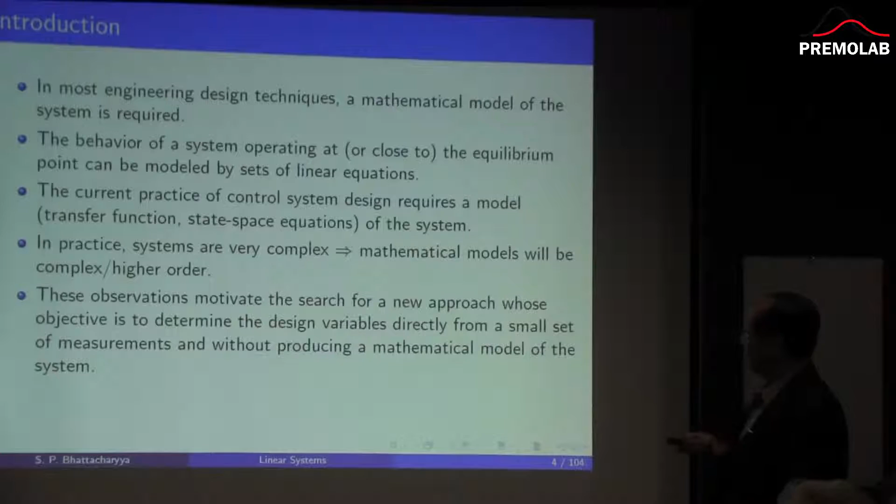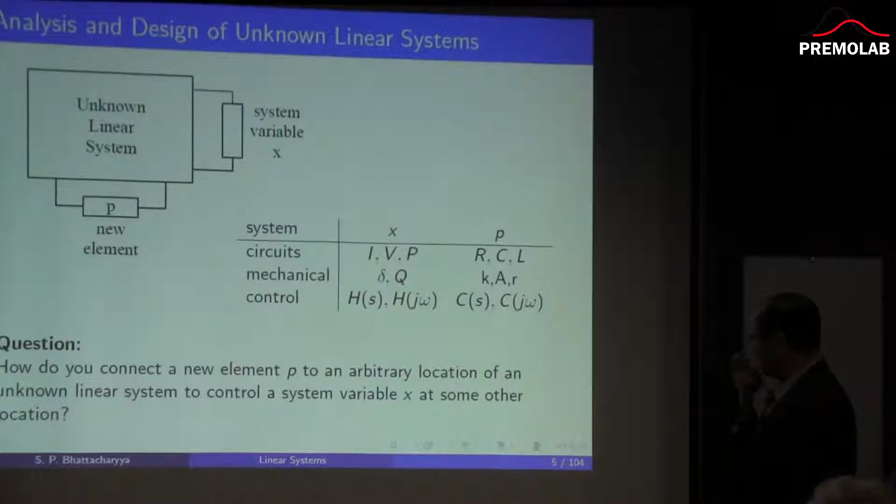So let's proceed: say you have an unknown linear system. You're going to add a new element. You're interested in controlling this variable. This variable could be currents, voltages, power, displacements, flow rates, transfer functions, and the design elements could be circuit elements, mechanical elements, transfer functions, dynamic systems. We want to connect a new element to achieve certain types of variables to be within some limits.

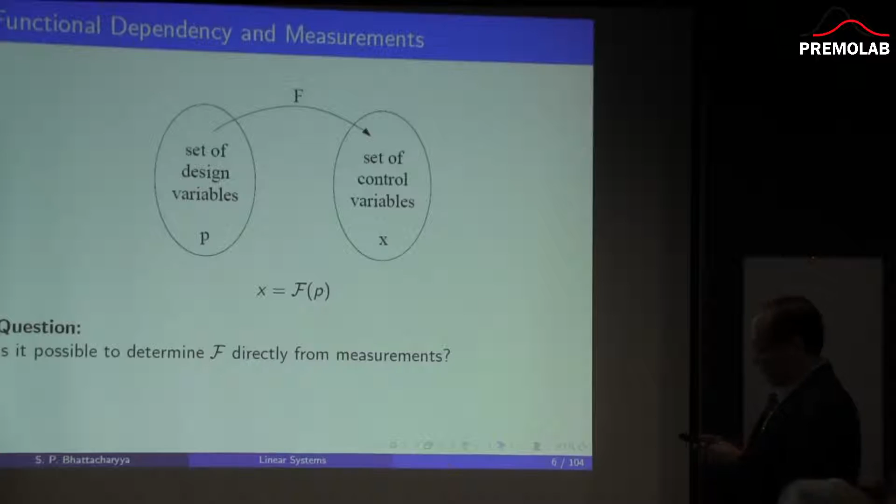So the whole thing is a question of finding out the functional dependence of these things without really identifying the system, because the system is fixed, and the effect of the fixed part of the system will manifest itself in this relationship. By a few measurements, you can extract the parameters of this relationship without explicitly knowing the system. So let's say you have a complex circuit. You are interested in the current in branch 9. Where is 9? Here. And your design variables are L1, C2. If you can find out these functional relationships, you can invert them, perhaps.

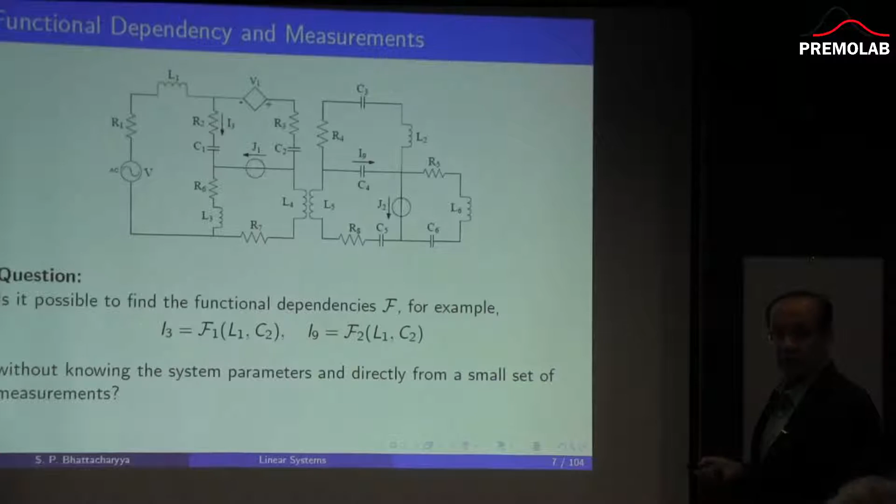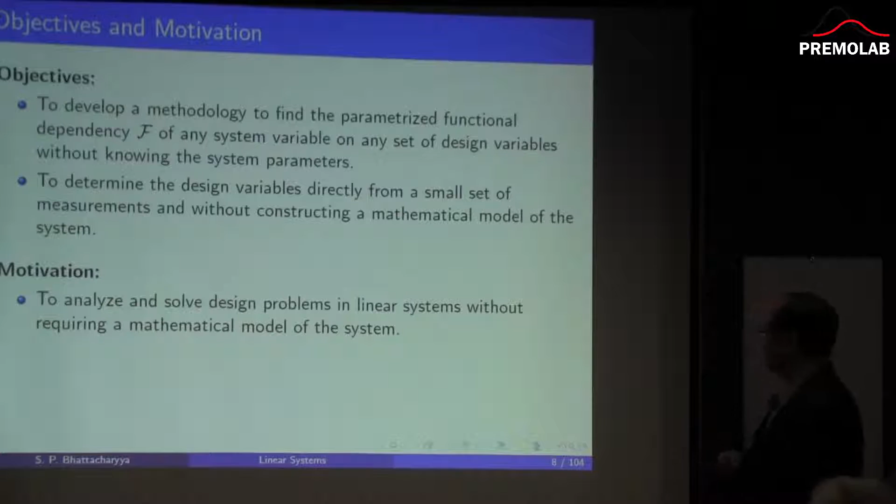So objectives are to analyze and design problems in linear systems without requiring a mathematical model. A few preliminaries. Let's say A is a matrix with a parameter P, scalar parameter, which enters the matrix A through this matrix A1. If you take the determinant of A, it's going to be a polynomial of degree at most r in P.

It's easy to show, and you can extend this to multiple parameters, and you get a multi-polynomial form like this, where the R1, R2, etc., which are the degrees of the parameters P1, P2, depend on the ranks of the matrices A1 through AL, the way it enters.

So let's say you have a linear equation like this, n equations in n variables. The Q's are sources, and typically they occur in this form in the right hand side, and the P's are as before, X's are the system variables, and we assume that A(P) is non-singular over the range of variations of P that are of interest. Otherwise, there is not a unique solution, and you are not talking of a physical system.

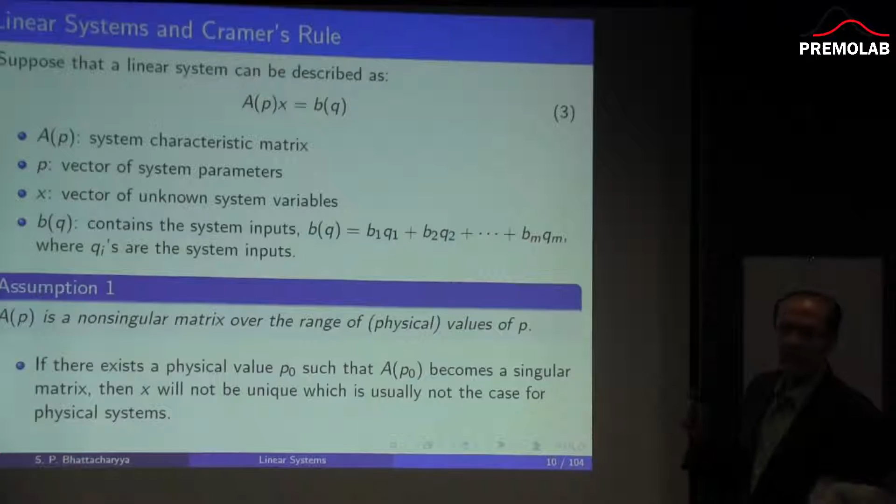So you solve for xi, and it's a ratio of determinants from Cramer's rule. And if you can evaluate these determinants, they are polynomials in P and Q. If you know the coefficients of the polynomials, you know this solution, and the coefficients can be determined by taking measurements. So basically that's what the talk is all about. So the solution for xi is the ratio of polynomials. It will be linear in Q, because when you take the determinant, the Qi's appear linearly, and it will be polynomial in P.

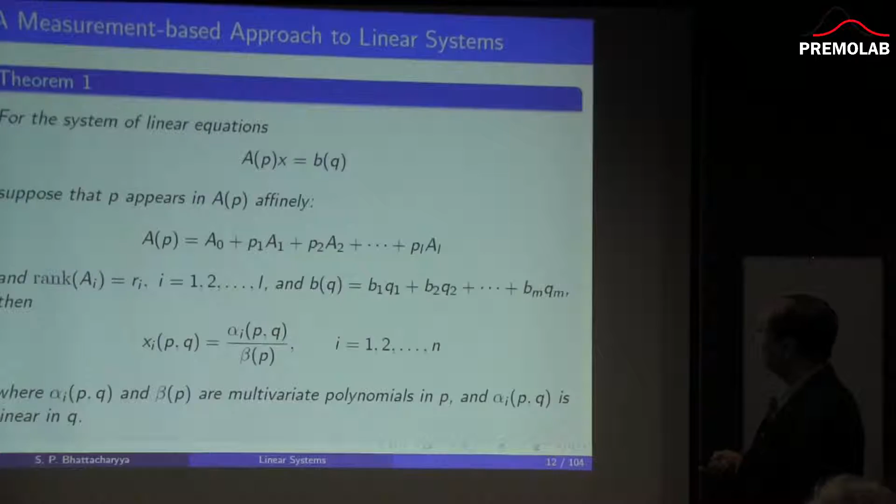So if you have mu unknown coefficients in those polynomials, you can attach elements to the system and take measurements, and then form an equation to extract the coefficients. Okay. So in that sense, it is a measurement based approach that directly designs the design elements. So we have a monograph that appeared last year, a Springer monograph describing this line of research. You can do this in what looks like a state space form, except this is static. So this is also described.

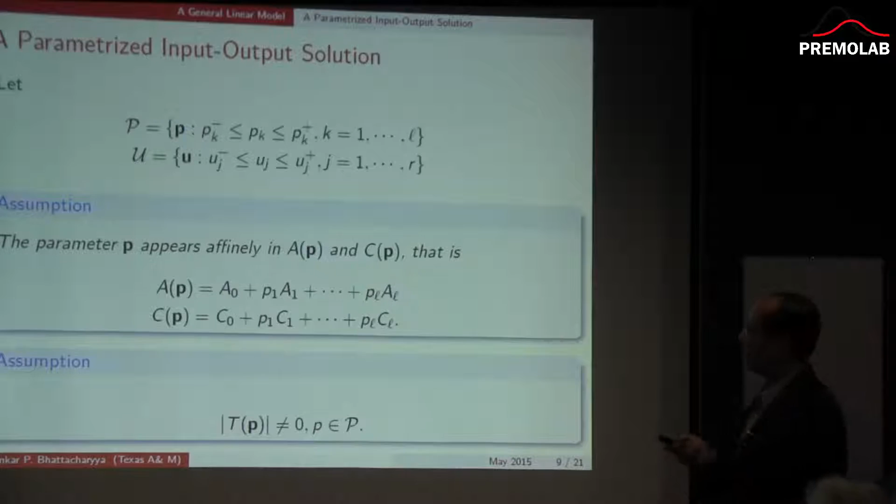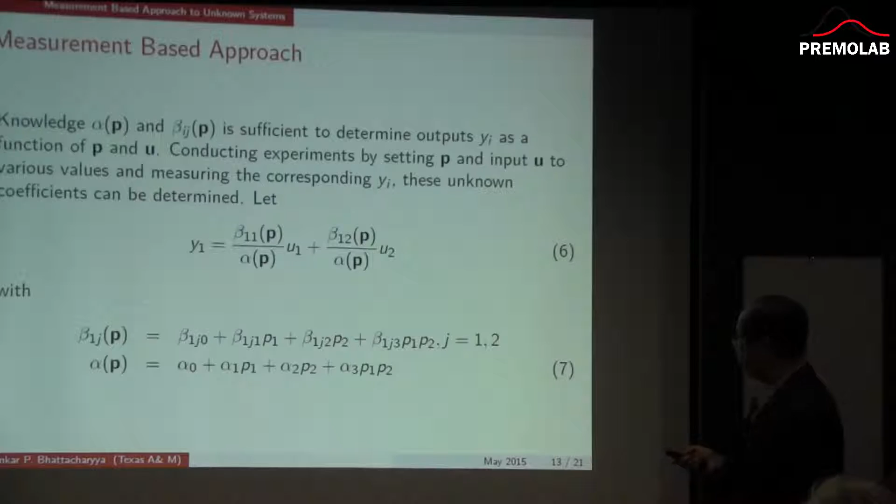You can consider interval parameters, design parameters, and interval inputs, and you get a functional dependency like this, which is relating the output vector to the input vector. So for example, focusing on y1, it's of this type. The coefficients betas and alphas are the ones to be determined, and they can be determined by setting, for example, the second input to 0, first input to be some particular input, and then set 7 different sets of parameters and measure the corresponding outputs. Then you can form a measurement equation, and solving that measurement equation, you can find the parameters alphas and betas. Okay.

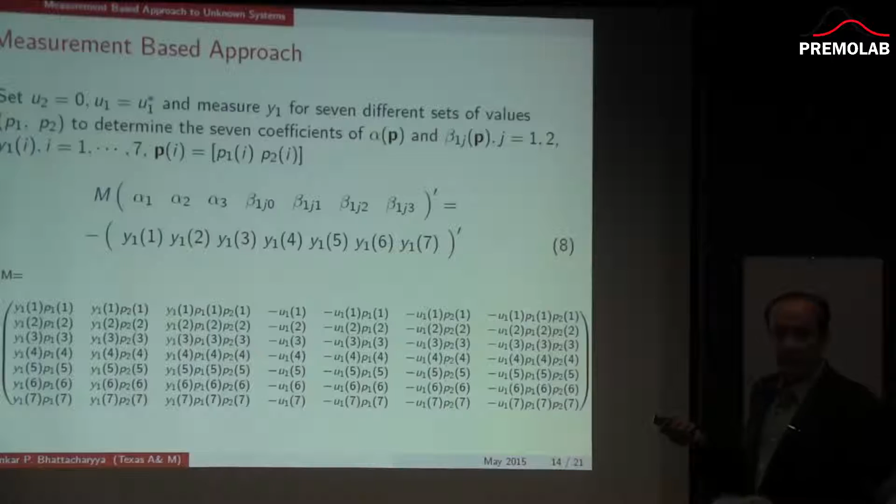So this measurement equation has to be well conditioned, it has to be invertible, of course, and so on. So there is some research to be done on what are the good measurements, because if this matrix is ill conditioned, you don't get reliable coefficients.

So here we are, DC circuit, unknown system. I want to control the current here by adjusting this resistor. It turns out that in these circuits, these branch resistors appear in the matrix A always with rank 1. Why? Because I can write down the branch currents, Ij, branch voltages, Vj, etc. The resistor Ri will appear only associated with current Ii, right? And so it will appear only in column i. It will always be rank 1. And regardless of the complexity of the circuit, you can have a million branches, but each Ri will appear with rank 1.

I'm saying this because we submitted this paper to a circuits journal, and the reviewer says, well, since you are considering only rank 1, you can only do simple circuits. That's not at all the point. It is generically rank 1. Only in very odd cases you might get rank 2 or 3, and it's not a problem to handle that. But you know, reviewers are nowadays so anxious to reject your paper that they immediately, but it's a foolish statement to make.

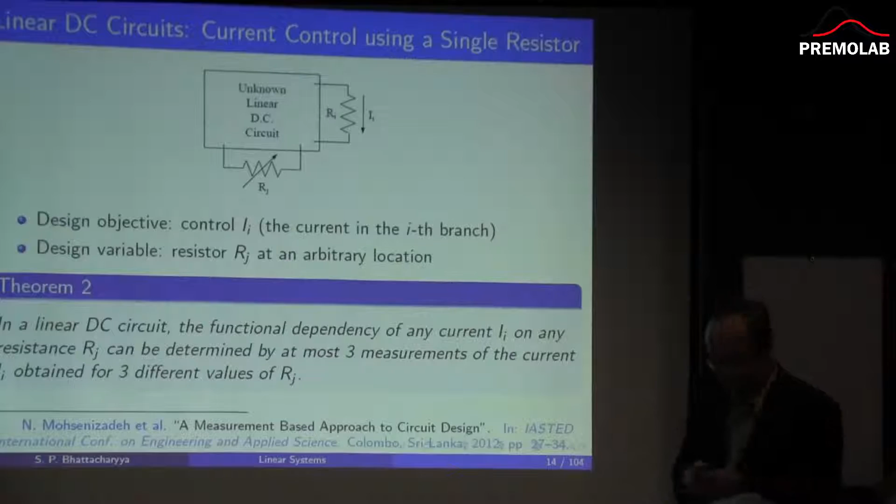So because of rank 1, this is going to be a ratio of polynomial of degree 1 over polynomial of degree 1. So 4 coefficients, normalized by dividing with 1. You have 3 coefficients. 3 measurements will extract those coefficients, right? So that's what we are saying here. So the form of the solution is like this because of the rank 1. Rank 1 is a generic property.

In fact, in almost any network, even a hydraulic network, this is true. The resistance Rj will occur with branch Ij. So by problem formulation, it is rank 1. Anyway, it doesn't make sense if both these betas are 0. So you can divide by 1 and reduce to 3 parameters. And then you take 3 measurements.

Set R to 3 different values, measure the currents, and form these equations to extract the alphas. And then you know the relationship. Okay? There are particular cases of this when the measurement matrix is singular, etc., etc. But generically, it is 3 measurements.

In Thevenin's problem, the resistor Rj occurs at the terminals. The control resistor occurs at the same place where you make the measurement. And in that case, one of the numerator coefficients is 0. And so it takes this form, normalized to 2 parameters. And that's why Thevenin's equivalents have 2 parameters, voltage and resistance.

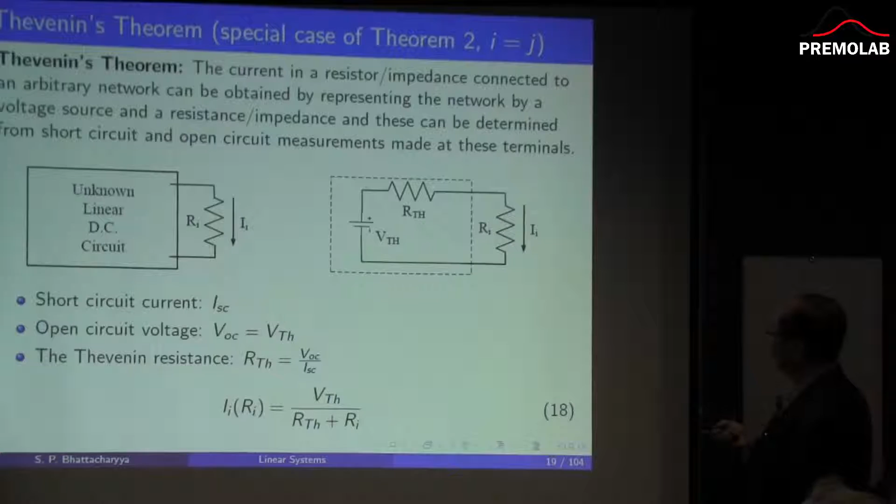Anyway, in Thevenin's problem, this is the situation. Rj and Ri are in correspondence, and so 2 arbitrary measurements suffice. Not necessary to do open circuit and short circuit tests, which are most often not feasible.

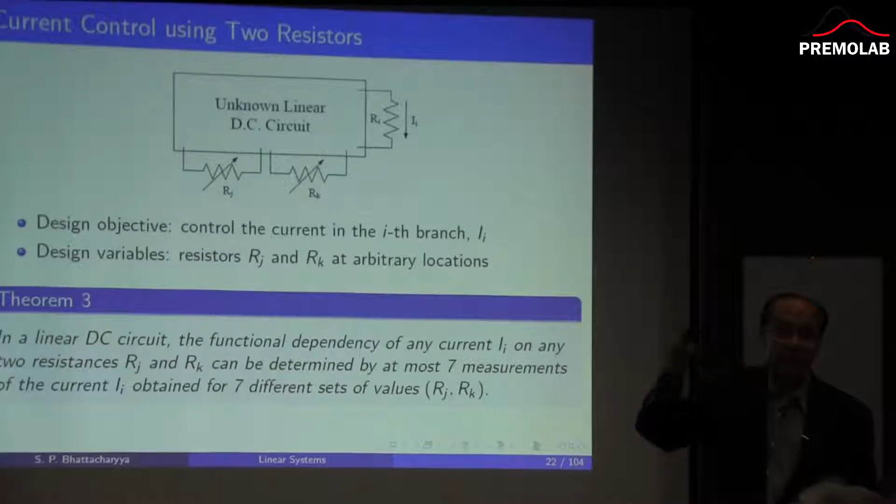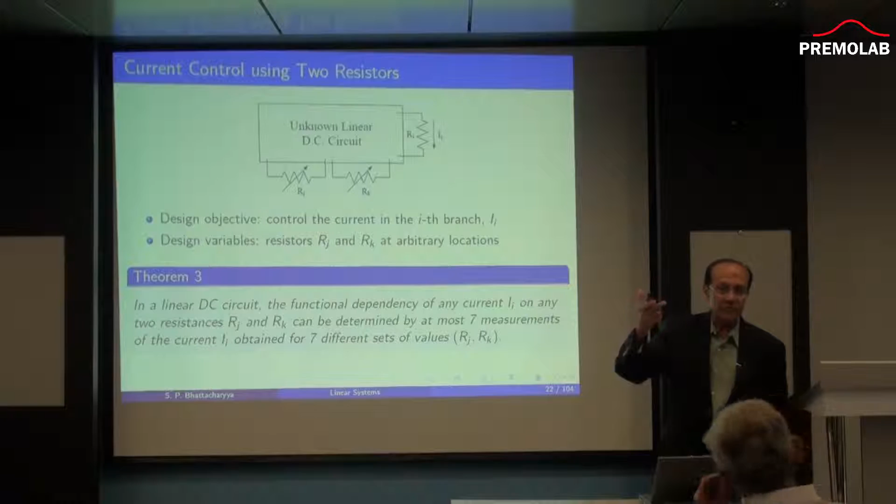What if you have 2 design resistors and you are trying to control current Ii? Well, you know that multilinear form, it's again rank 1 with respect to each resistor. So you're going to get multilinear in Rj Rk over multilinear in Rj Rk. You have 4 coefficients over 4 coefficients. Normalized with 1, you got 7. So 7 measurements of the 2 resistances and the current that you get will determine the system of equations, will determine the unknown coefficients.

So that's how you get the measurement equation. And then depending on the rank of the measurement equation, if you have over parameterized and there are some special cases, you can handle those. Some of those coefficients could be 0. You will detect that from the rank of the measurement equation, because that corresponding coefficient, when you take the determinant, it's going to be 0. So the measurements reveal a lot about the system without revealing everything about the system. It just gives you the information you need to design your parameters and not more.

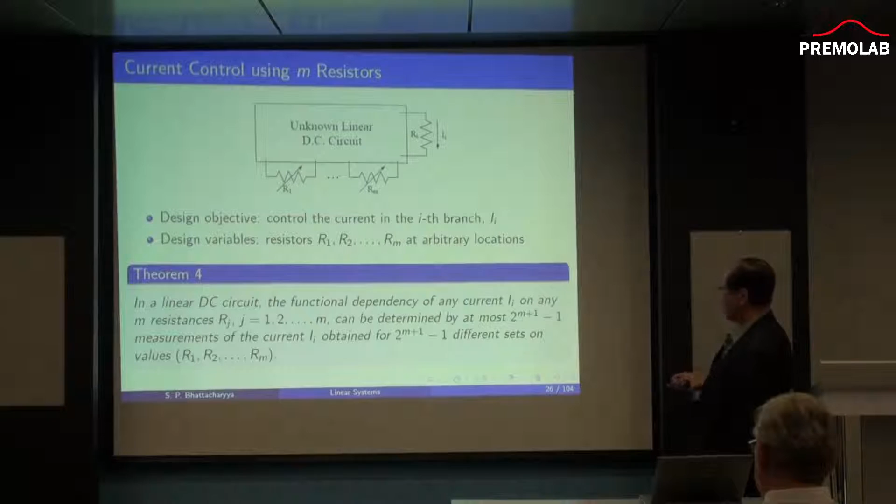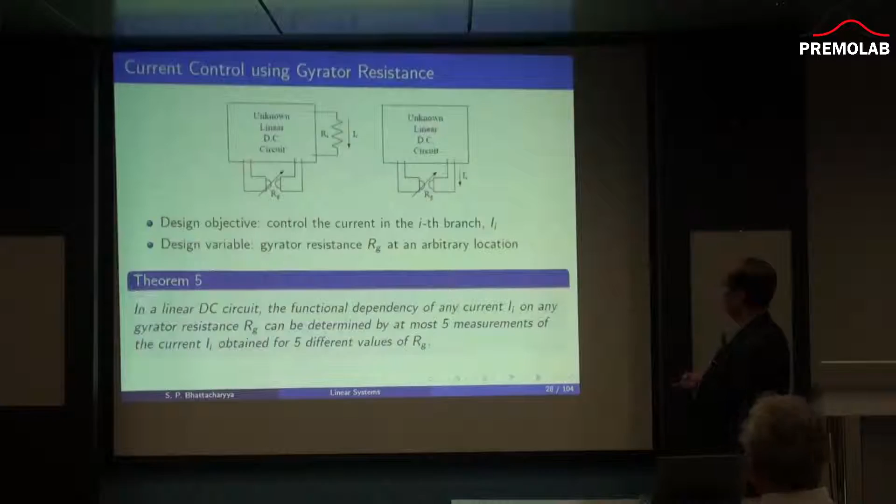So in general, for M design variables, you can take that many measurements, and you can extend these kind of results, because you have this, this looks worse than it actually is. It is actually multilinear in all those parameters. This example was included because

people said, well, there are situations where you have rank 2 dependence, for example, and there are circuit elements called gyrators. I was not aware of what a gyrator is, but the reviewer pointed out, why didn't you consider gyrators? So we looked up gyrators, and a gyrator is like a mutual inductance element. The voltage at terminal 2 depends on the current in terminal 1 and vice versa.

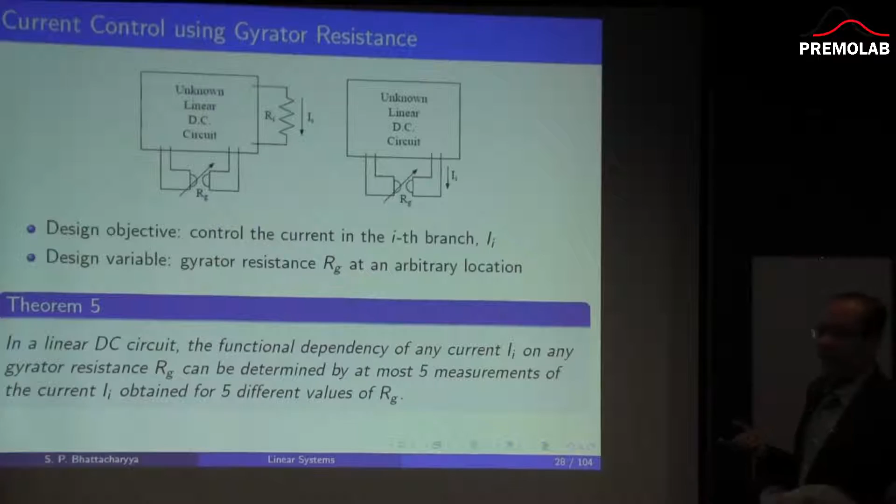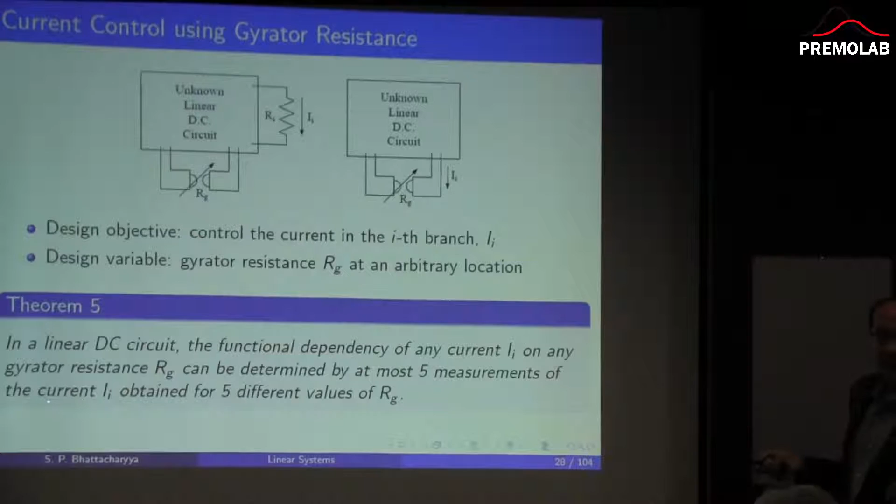So in that case, you get rank 2 dependency, and then in the simplest case, you're going to have 5 measurements rather than 3, because it's going to be a polynomial of degree 2 over a polynomial of degree 2. Okay.

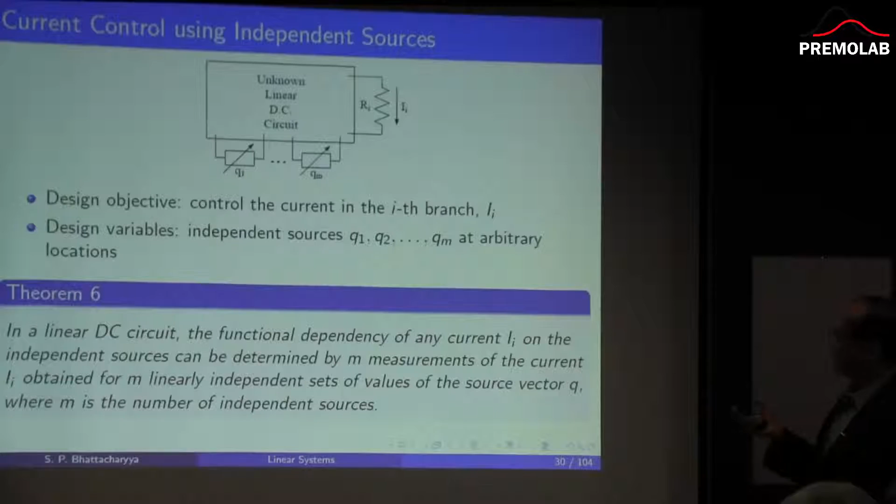What about if your control variables are sources? It's very simple in that case. This is where the superposition comes in. You just have a linear function of m parameters, and you can just set them to different values and, with m measurements, you can find the alphas, alpha 1 to alpha m.

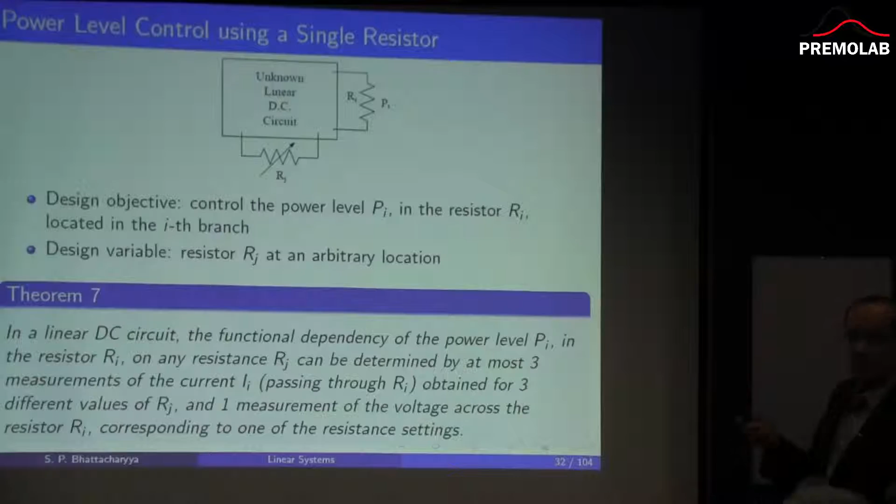If you want to control power, it is I squared Ri. So if you know the max and min of I, you know the max and min of I squared also. And so since it was monotonic, the power will also be monotonic. Now in Thevenin's case, there is a subtlety, because it's I squared, but then it's multiplied by Ri itself, and because of that, you don't have monotonicity, you have a maximum.

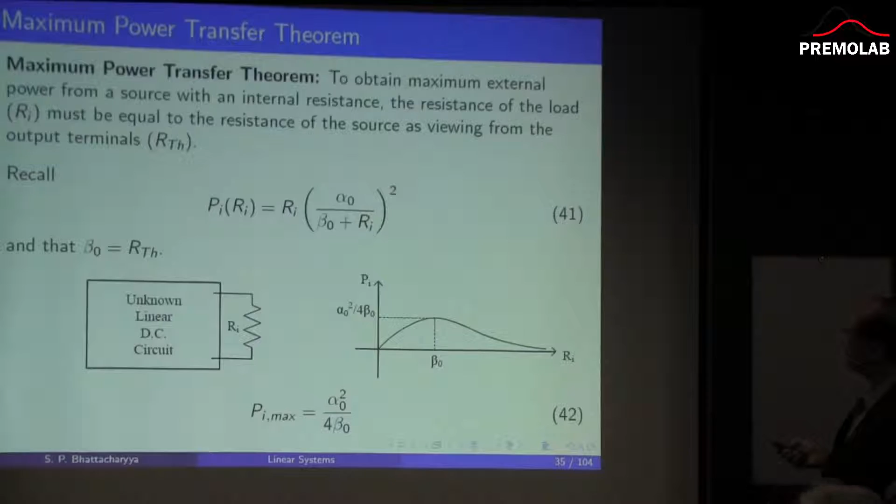Again, the maximum can be found from those 2 arbitrary measurements by finding alpha 0 and beta 0. So you can have a generalization of this maximum power theorem. You want to maximize the power in this resistor by adjusting Rj. You can get explicit expressions for what to set Rj in terms, and it's all in terms of the measured variables.

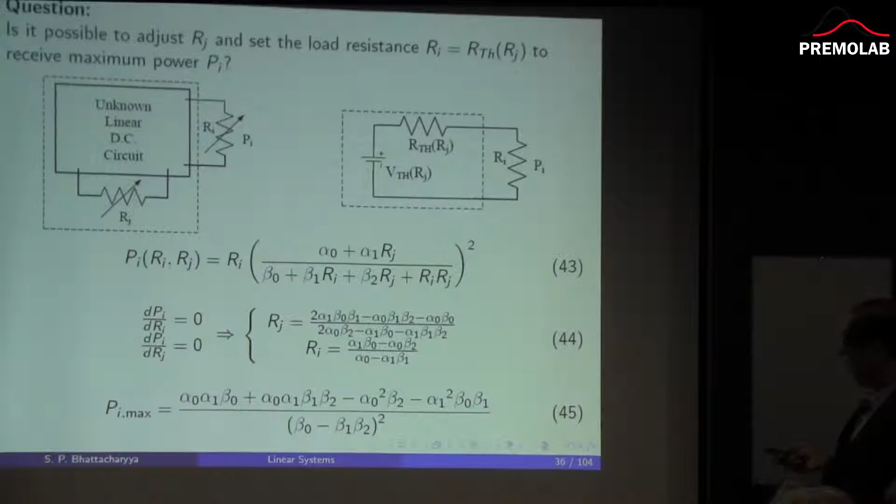So, are you going to tell me when the time is almost? About 2 minutes. About 2 minutes. No, actually 5 minutes. Wow. So I am at 36, I have 104 in 2 minutes.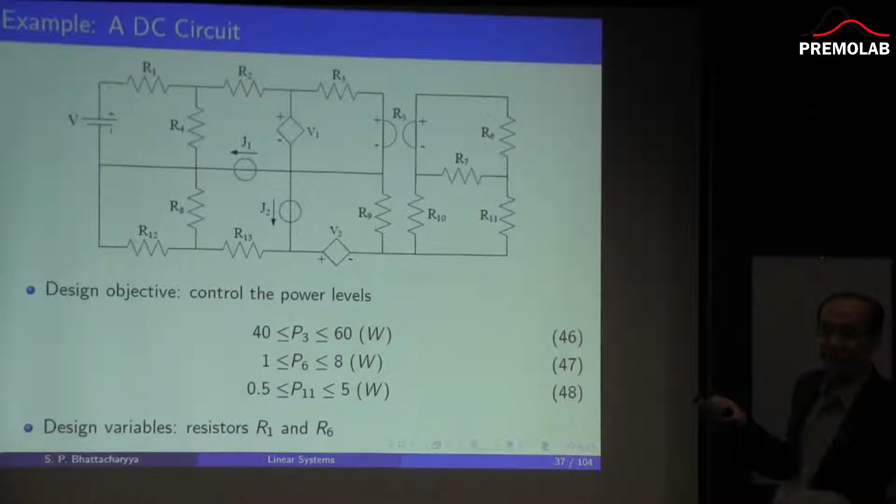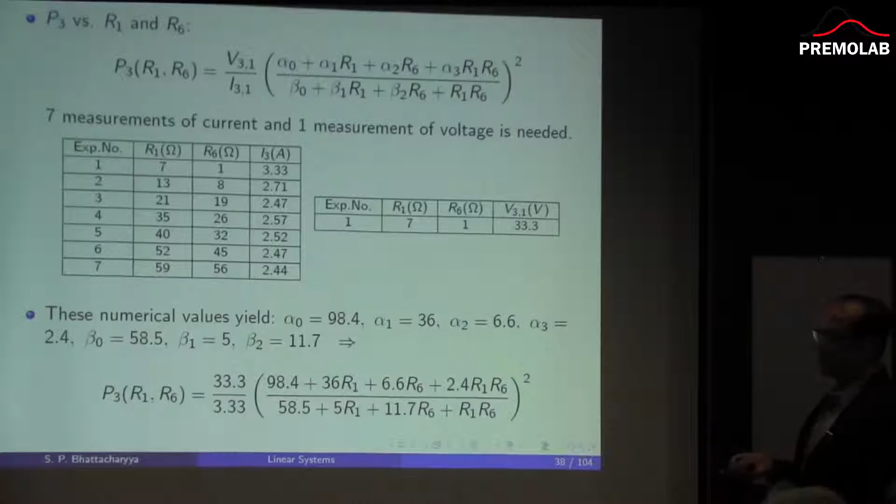Anyway, so let's run through these slides. Here I want to use R1 and R6 as design variables, and I want to control the power in these 3 branches, 3, 6, and 11. Okay, and I don't know this circuit, of course. Take some measurements and find those coefficients. Then you have the functional dependency, and you can plot each power in this plane as a function of R1, R6, P3, P6. It shows the monotonic behavior in each direction, right?

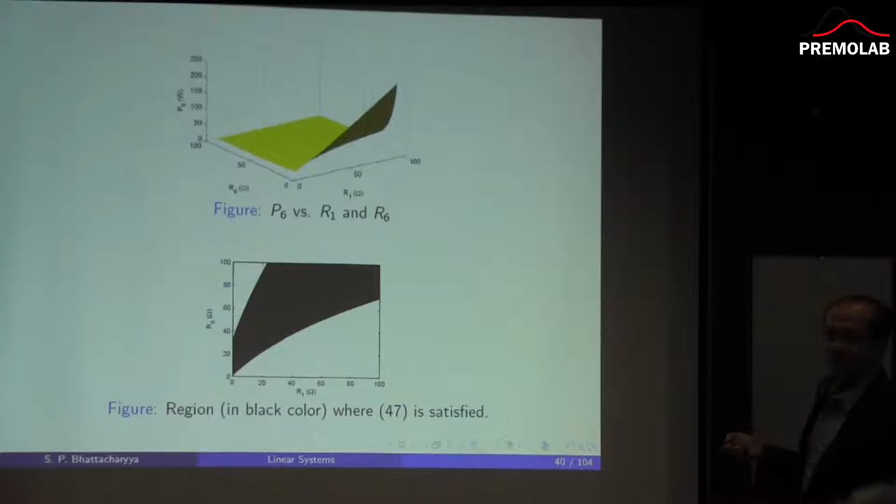And then you can impose the power level constraints 40 to 60 and extract the design variables. You can do the same for the next constraint and the third constraint, and then you can intersect those to find the feasible range of design parameters. So this is really neat because nowadays there is a lot of preoccupation with designing low power circuits, etc. You can do these for these large scale circuits without knowing the model, just measurement based.

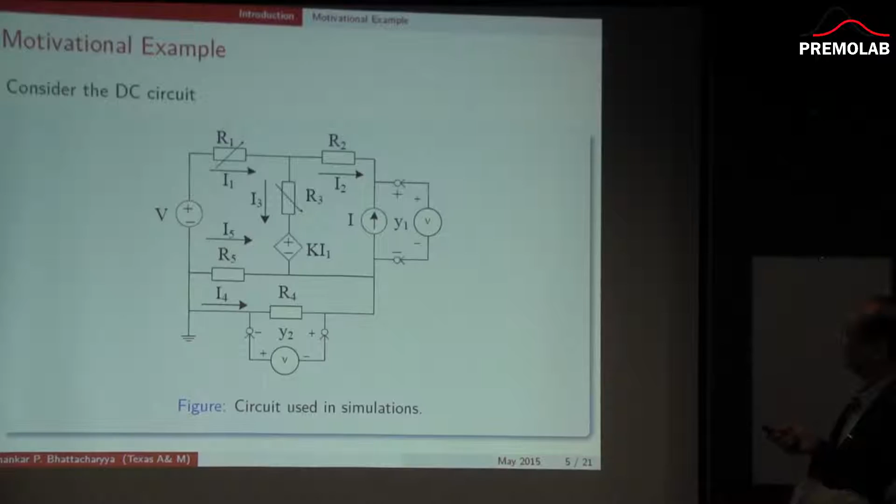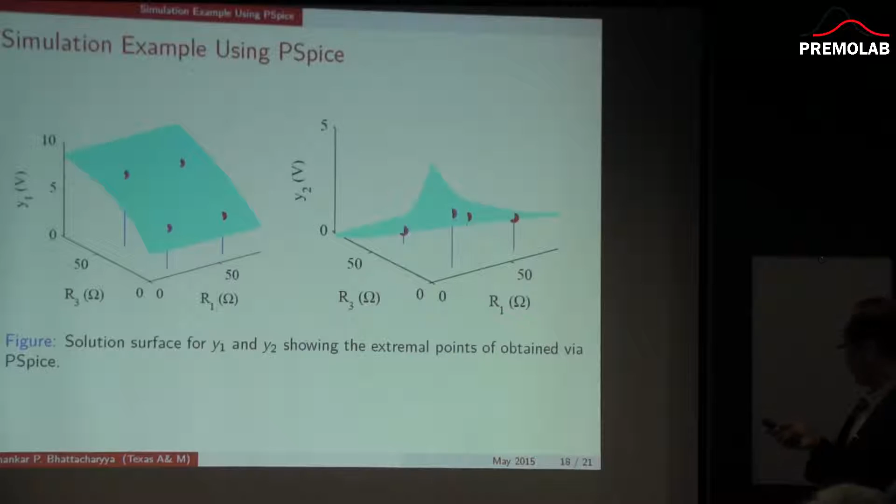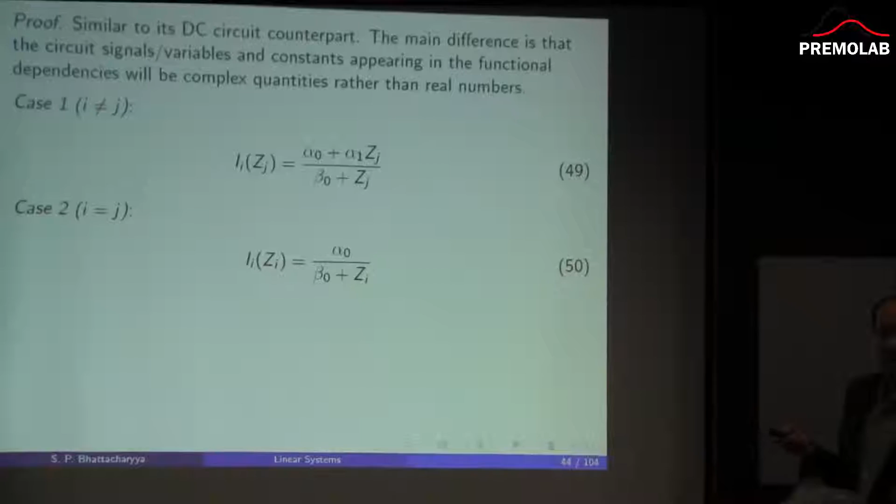Okay, so another DC circuit. Let me skip these DC circuits. There's too much DC circuits. So again, this monotonic behavior tells you that the extreme points are at the extreme values of the intervals. The same thing for AC circuits, except now Cramer's rule applies with complex numbers, and you have impedances and complex currents and voltages if it's a circuit operating at a fixed frequency. And so you can solve problems of this type.

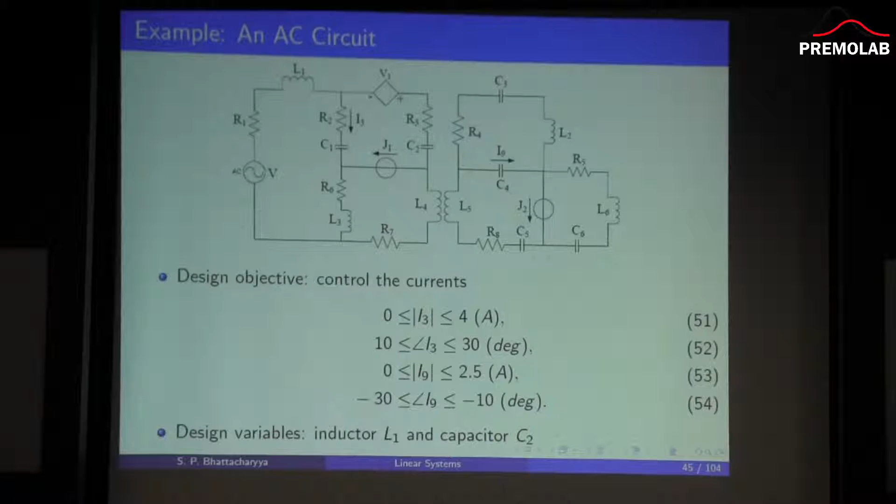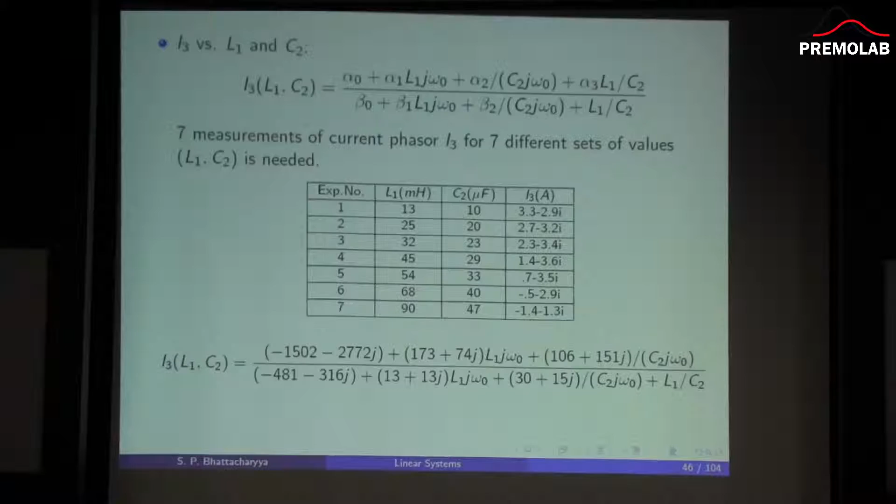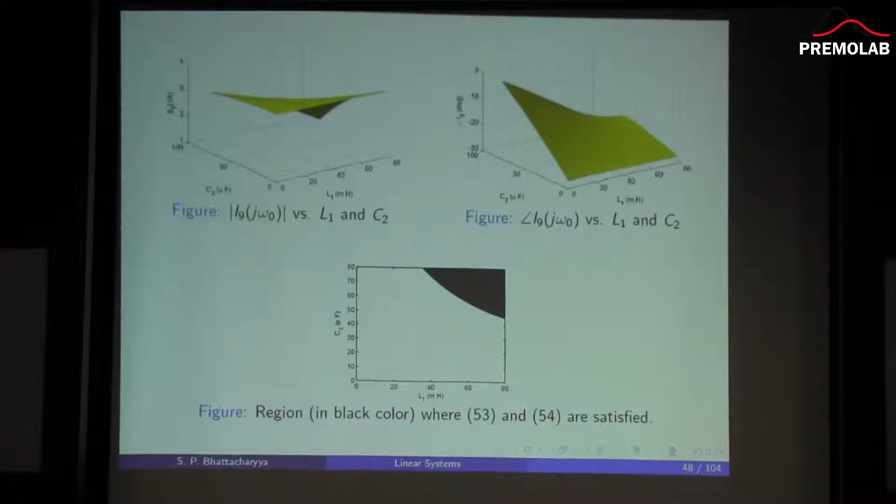You can constrain the magnitude and the phase, and find out the range of design parameters for an unknown circuit. This is the functional dependency after taking some measurements with L1 and C2. And then you can do the same. This is magnitude versus L1, C2, phase versus L1, C2. You can intersect them, and then you can find the range of design parameters.

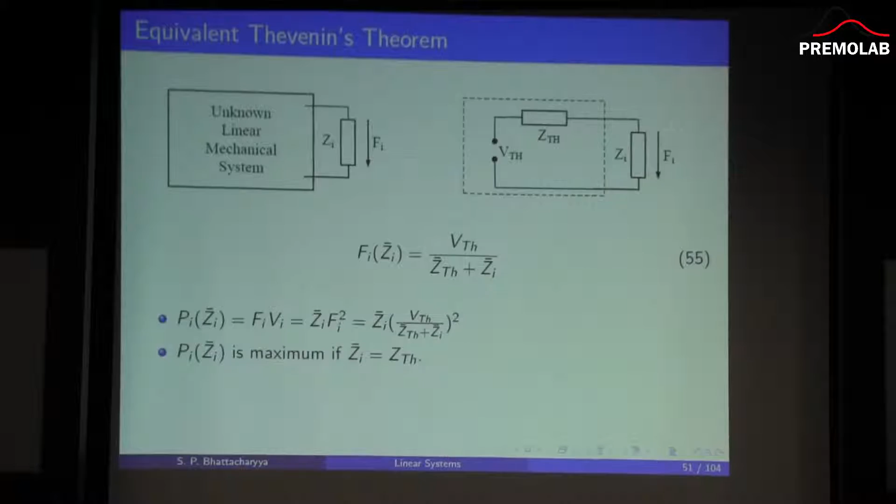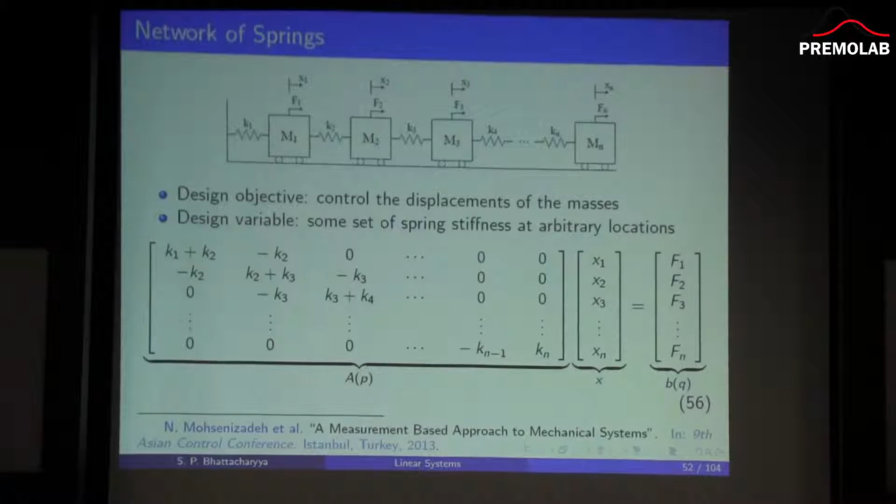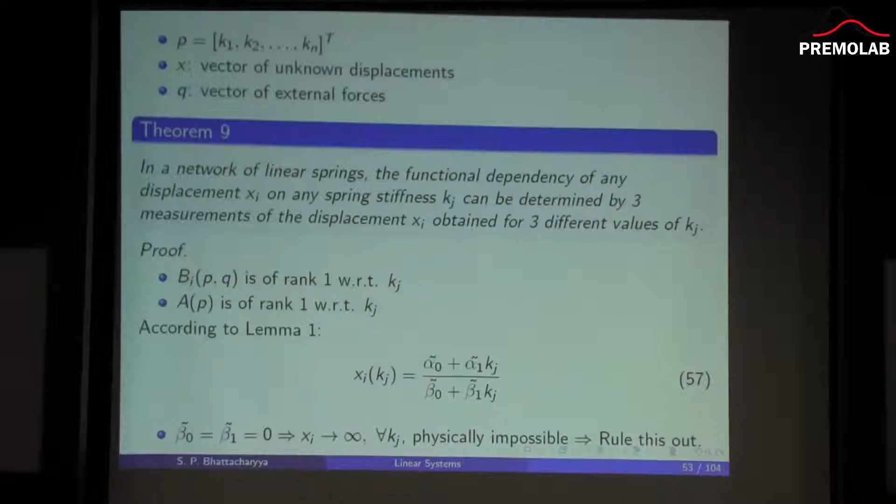You can do mechanical systems, and then you can develop a Thevenin's theorem for mechanical systems. Mass spring systems. Again, you have a more complicated looking matrix, but basically it is rank 1. If you look here, it is rank 1 in K2, it is rank 1 in K3, right? And so again, you are going to get this type of dependency. So 3 measurements can solve that problem if you want to restrict the displacement and adjust the spring kj as the design parameter.

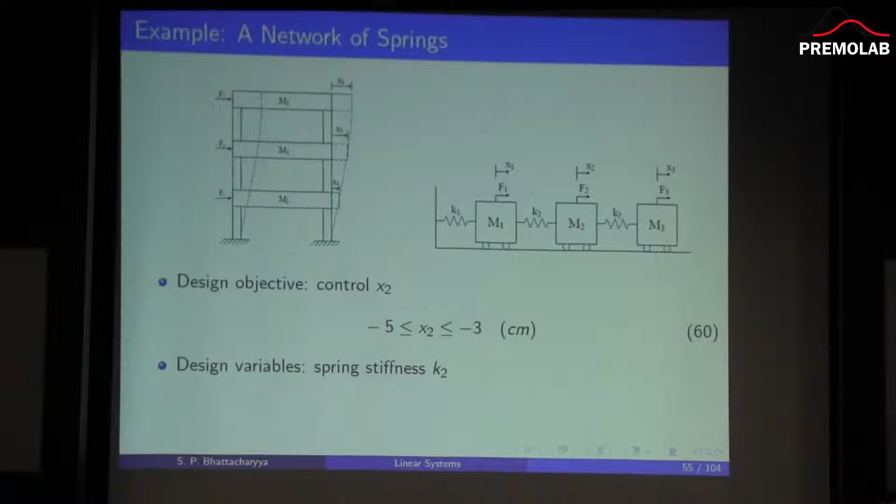This is like a civil engineering building. You want to restrict the displacement. It's equivalent to a mass spring problem. In truss structures where you want to control the displacement, you want to size the truss element, it is again a linear equation.

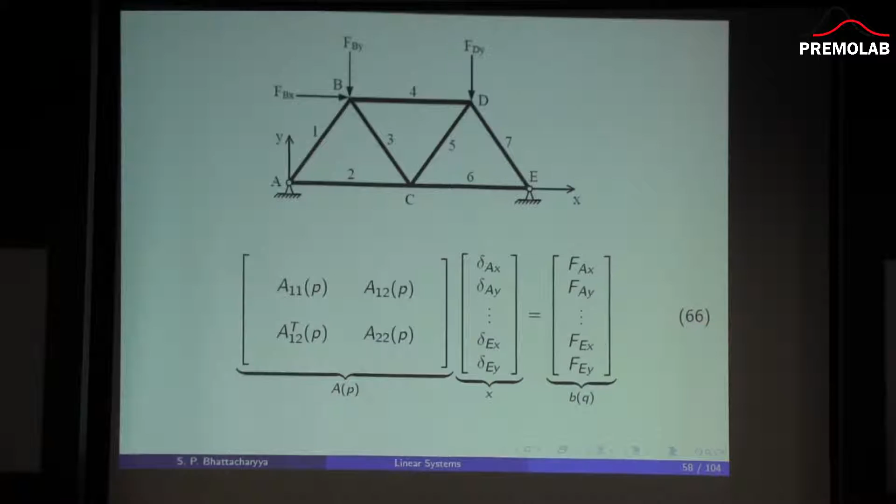So once you get away from circuits to linear equations, the whole world opens up to you. And all these problems fall under the same umbrella. The matrices look complicated, but we don't care, because we don't know these matrices. All we are interested in is the rank dependency. As long as that is a low rank dependency, you can extract the parameters from measurements.

He's got up. That means I got to sit down.

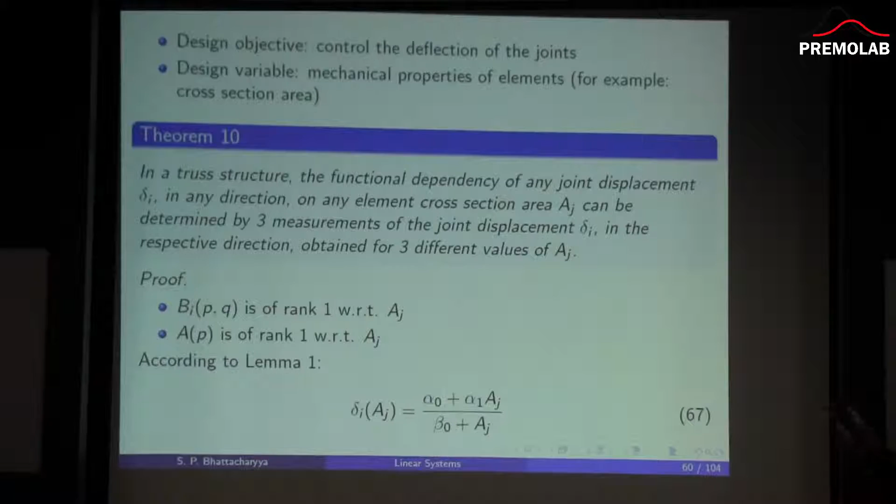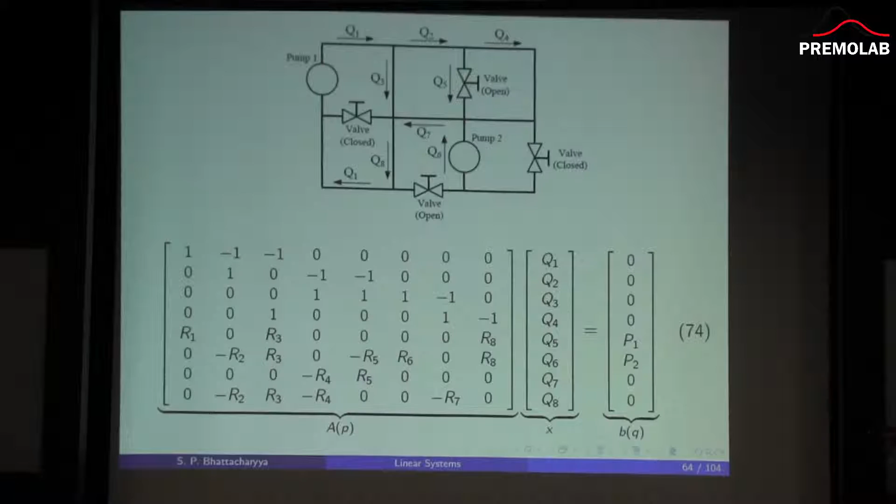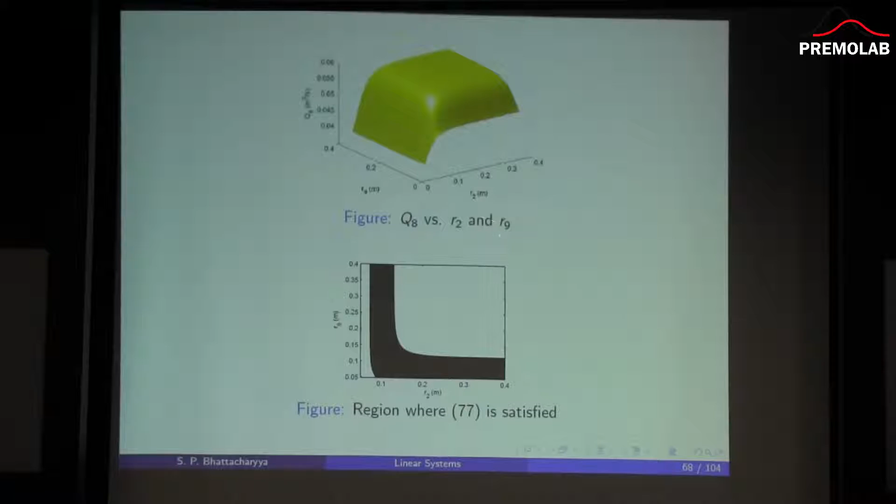Okay, so 1 minute. So let us quickly run through truss structures. You can do hydraulic. I told you about adding an extra line to a hydraulic network. You can solve a problem like that, controlling the flow rates. An interesting application is, so this is the hydraulic system design. You can design the radii of the pipes to be added. Robust stability analysis, the maximum minimum occurs at the corners of these boxes. Kharitonov would have liked that.

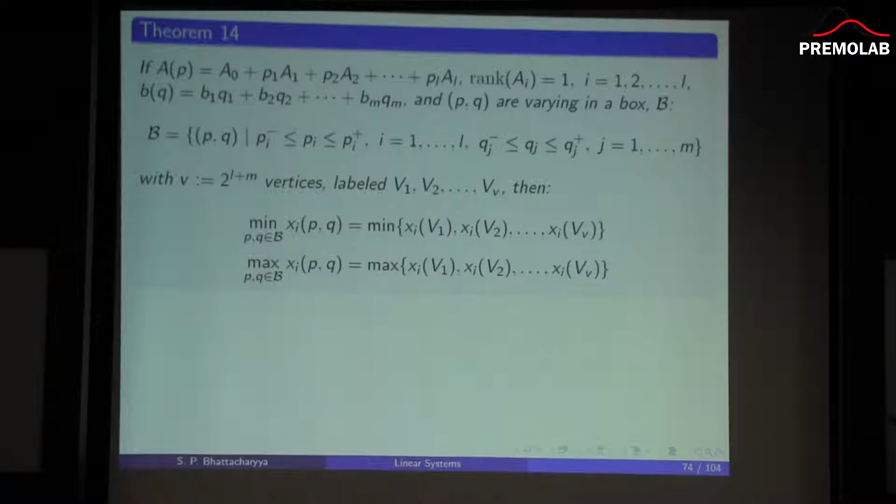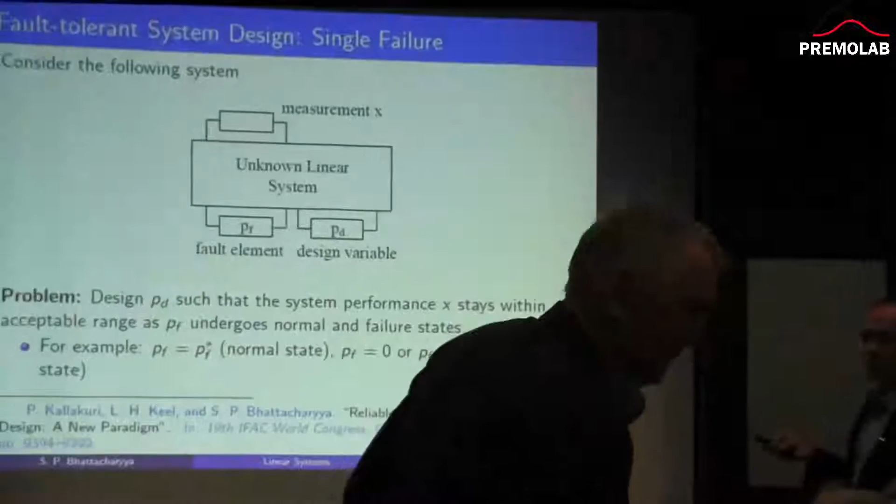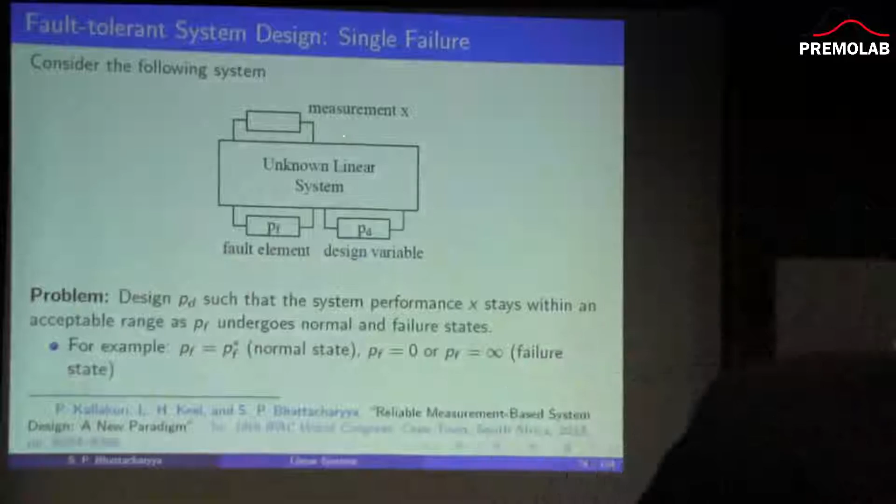Okay, fault tolerant design. Let's say you have a faulty element and you want to design an element to keep this variable between prescribed levels, whether the faulty element is on or off, at 0 or infinity, like short circuit or open circuit. You can solve a problem like that from the functional dependence.

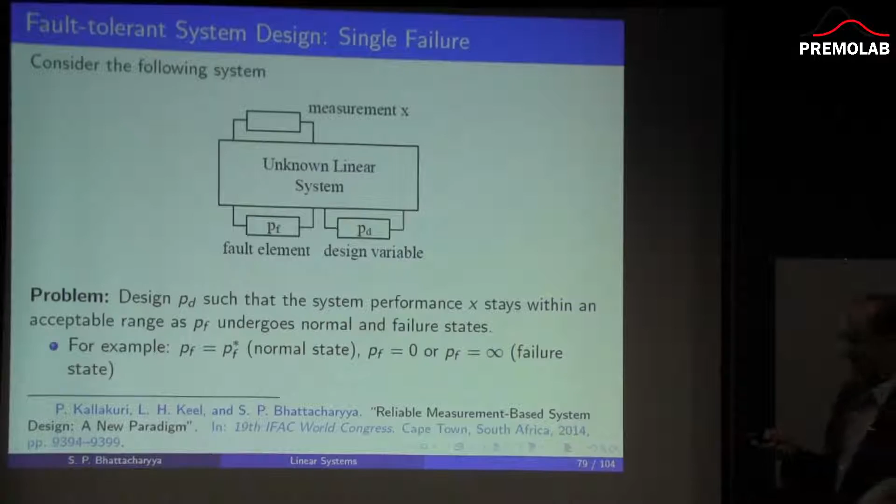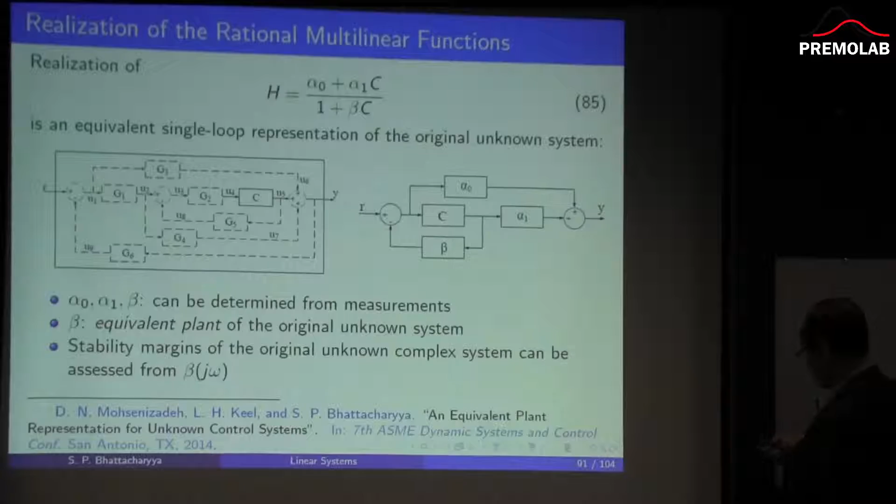Let's go. So you can do control systems. An arbitrarily complex control system can be replaced by one like this. This means that stability is only related to beta. C must stabilize beta, and beta can be found from measurements from here. Okay, I'm going to run through conclusions. Thank you.